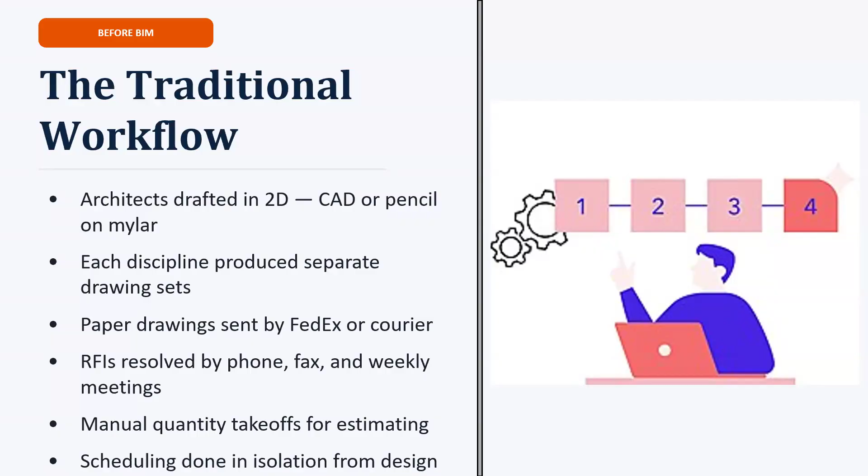The consequences are pretty expensive, because there used to be something called light tables. It's a table with a sheet of glass, just a plain sheet of glass, and then you'd have powerful lights underneath it. And then I'd take my white sheet of paper with my structural drawings, let's say second floor structure, and second floor mechanical. I'd lay it on top of them, and then I'd go through each one to see, oh, what's the elevation of this beam? What's the elevation of this duct?

And I would check them off with a green check mark. Every time there was a problem, I'd circle it with a red one and say, hey, we need to figure this out. And 95% of the problems you caught that way. With the 5% that you didn't catch, that ended up being a problem. What do you mean that ends up being a problem?

Well, actually, let me get back to that in a second.

The other thing that always happened was these drawings, as the RFIs came in, got updated. But with all these issued drawings, think about a building - there are anywhere from 50 to 70 people from different trades that have to come together to finish it. What's the chance that somebody is not looking at the current set? It happens all the time, and that became a problem. All of a sudden you're building off an old design that's not even the current one. And guess what? Now you have to rework it.

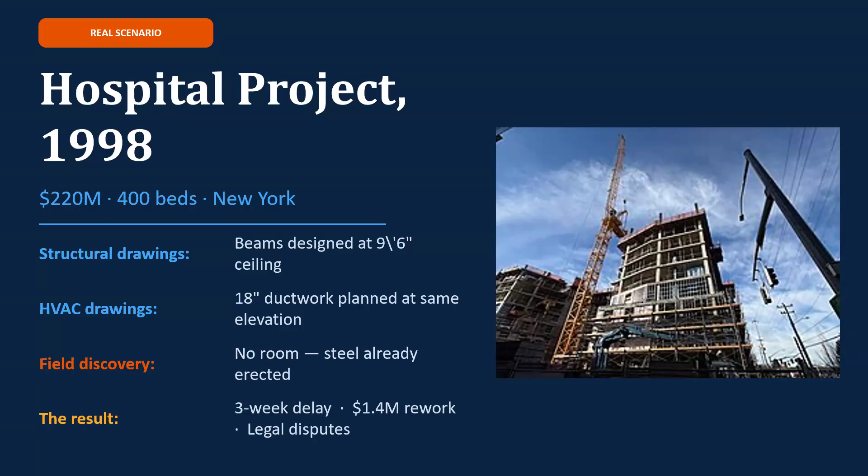Well, enter BIM. It's a 3D modeling environment. First of all, BIM stands for Building Information Modeling. It's a 3D representation of a physical facility, except there is intelligence associated with it. We sometimes call them parametric models - what are the parameters? Well, the parameters are the information about each of the objects. So instead of using lines and drafting tables to draw our buildings, we started building with objects, where a steel column knows how heavy it is, knows that it has to be vertical or slanted, knows that at the ends you've got to have connections. Those kinds of things we're able to build into that, and that's changed everything as far as how people think about it.

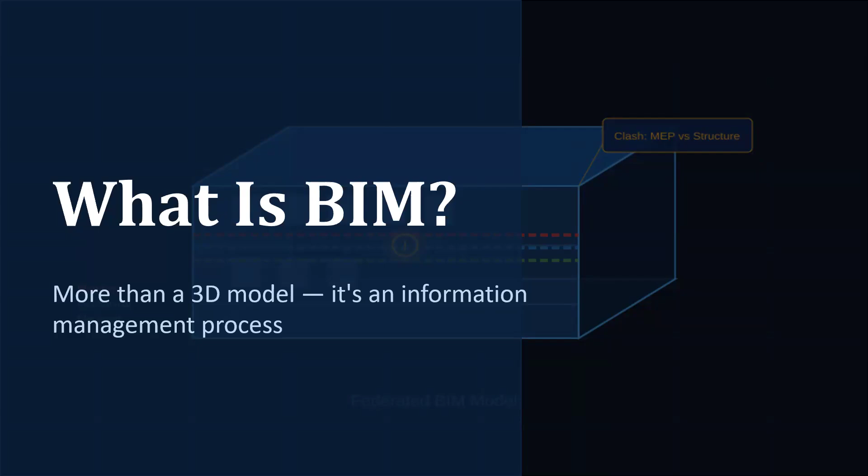It has geometric data. It's a collaborative process. And if you think about a building has what I call a life cycle, right? From the time the owner comes to you and says, I want to build this new facility, to the time the owner says, this building has gotten too old, I want to tear this down and build something else here, or rebuild it. And in the process, you may have done 8 renovations to the building.

But that's the entire life cycle of a building. Well, BIM is able to hold that information throughout the life cycle of that building, from conception to demolition.

The National Institute of Building Sciences has something called the National BIM Standard, and they define BIM as a process supported by technology for creating and managing digital information about a built asset across its entire life cycle. It's a digital representation of a physical asset, but it's a process. Yes, it is software enabled, but BIM itself is a process.

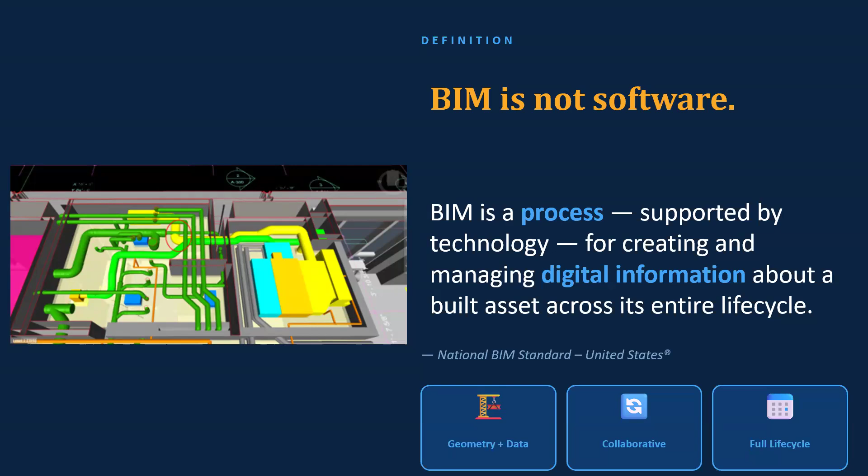I'll get into more of the geometry and that sort of thing. Here's a brief history about this.

There's a gentleman, he's passed away now, Chuck Eastman. He was at Carnegie Mellon in the 1970s when he said this. He called it the building description system. He actually said we need to build buildings digitally in this way. Of course, that didn't come to fruition for another 30 years because our computers weren't fast enough or powerful enough to do what we're able to do today. Chuck eventually left Carnegie Mellon and came to Georgia Tech, where he retired and passed away as an emeritus professor.

In the 1980s we had some programs, RUCAPS, ArchiCAD. ArchiCAD isn't that anymore, but it originated in Hungary when Hungary was part of Russia or the Soviet Union.

In 2002, Autodesk acquired this software called Revit. Revit was a startup company based out of Boston, with many of the principals from MIT. One of the guys who was a partner in the original firm that sold Revit to Autodesk was from Atlanta. They sold it when the dot-com bubble was happening, the stock market was crashing.

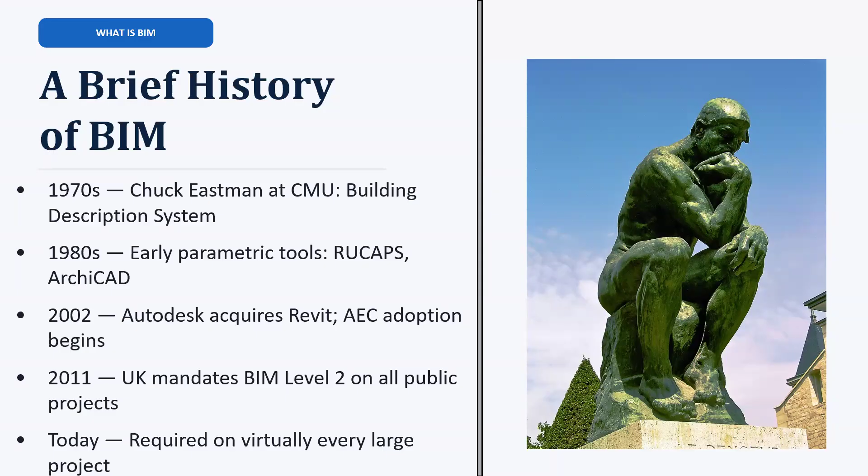However, if I'm an architect, I'm not drawing anything that's not BIM. So consequently, it's ended up being everywhere. The contractor may not use it on a dentist project, but they certainly would not touch a hospital without BIM. They will say, listen, we can't do this, there's too much risk involved. It saves us so much time and money that we do not want to touch a project that doesn't have BIM on it. And BIM has, again, not only the 3D geometry for everything.

Now let me lay the groundwork for something we're going to see in the fall - there's something called a BIM server these days. What is a BIM server? Well, first of all, what is a server? What do we use servers for? Data storage, right? And BIM servers are just that, to store BIM data.

At the start of a project, we'll start a project on a BIM server, and the architect will give access to all the other designers. Then all the other designers can go and put in their stuff as the design is progressing, and they can see how their work coordinates with everybody else's. If they see a beam, they can reroute the duct under that beam. So it is now a collaborative environment, because we're able to see everybody else's design and understand as we're designing, as a design team.

But in the start of any construction project, the first thing that happens is the architect and the structural engineer will get together and say, okay, where are we going to place our columns? Because that dictates how the building is going to look and feel. You can't have a column in the middle of a classroom, that defeats the purpose of the classroom. So we're going to first locate our columns, and then they can have a discussion.

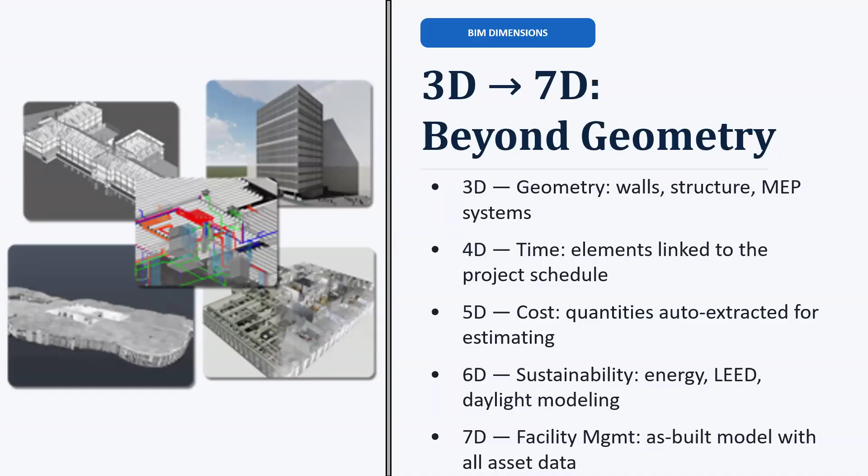People are managing their buildings in that way right now, and all of that got enabled by BIM. So how does BIM change everything? It changes design, construction, and operations. Very briefly, we used to do 2D drawings. We don't do that anymore. We now do parametric models.

Here's the thing people had to do: when you open a set of drawings, if everything is drawn by hand and I decide my door needs to move a couple feet this way, well here's the problem, I have an elevation view I need to fix and a plan view. So I had to revise multiple times, whereas that's not the case in BIM.

In BIM, you draw something in 3 dimensions. There's no 2 dimensions anymore. Everything is connected. You may look at it in 2 dimensions, but you're drawing in 3 dimensions. You catch the design errors before they become a problem, most of them anyway. I'll tell you some stories about things that happened on this campus that ended up becoming very expensive, just because we didn't use BIM during that time.

The owner can now visualize what the building is going to look like and tell you, I like this, I like that, can we do this instead. We could do virtual walkthroughs now, as the owner comes into a dark room with 360-degree projectors. I can project my space in there and have the owner walk around at a 1-to-1 ratio so they feel like they're actually walking in the building. So the owner can say, I don't like that, I like this, can we change that. You couldn't do that with just 2D drawings.

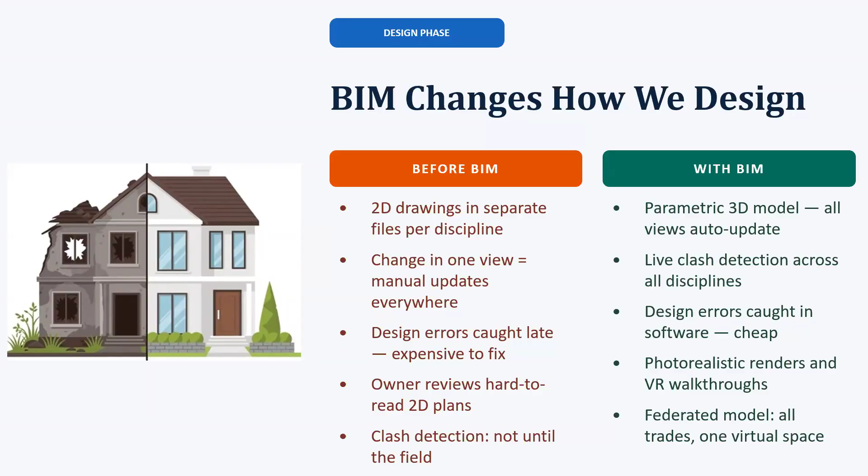And then anytime there were clashes, if there were clashes as in something ran into the other, we caught a bunch of them, but the ones that we didn't catch ended up being expensive.

And then there's this term now we call VDC, Virtual Design and Construction. This is really interesting to me. Almost all companies have a VDC principal, but they don't call them vice presidents, because often they're the youngest people at the leadership table, right? You have a seat at the leadership table and you're most likely under the age of 40. The guy at Brasfield is probably about 40, right? Biggest construction company in the Southeast, right?

Russell Gibbs. But essentially this whole office came about in the construction industry. Sticking to Brasfield, and all construction companies are very similar to that. Before 2010, let's say, if you graduated from building science and you wanted to go work for Brasfield, almost always you started in estimating, because they had about 300 estimators. Today they have about 20, but they have a VDC staff that's about 70, right? And they have VDC people in all projects and what have you, right? So this whole office called VDC, Virtual Design and Construction, came about only in the last 15 years or so, right? Or at least popular in the last 15 to 20 next years.

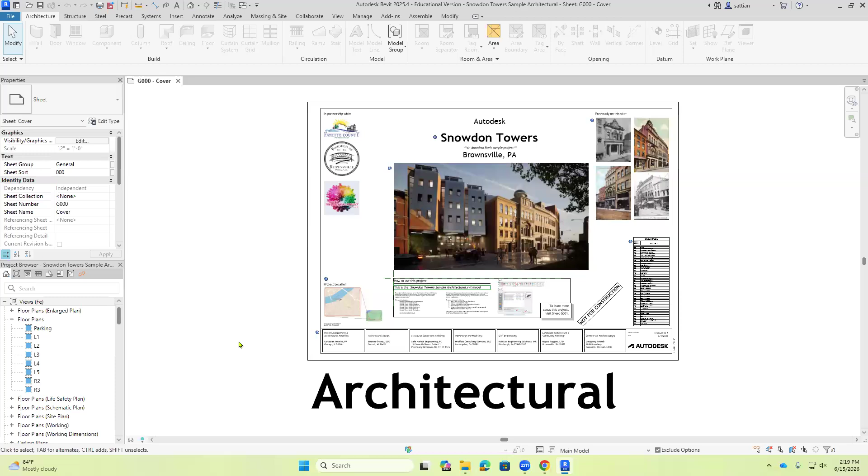Jenna, I need to talk to you after class. There's no point in you doing the same thing that you've already done eight times in architecture school. I have a different assignment for you.

You came here to learn, right? You want to give me a different one too? Are you an architect too? All right, both of you. Yeah, there's no reason for you guys to do this through this assignment.

Well, there's no point. What are you gonna do, relearn the same thing? At least the architecture and structure part, and then the rest. You probably haven't developed HVAC, plumbing, electrical models, which we'll do, and you're gonna have them. I'll let you do that along with the rest of us. But as far as these projects, I think it's wasting your time to do this again. But listen to me anyway. So I don't mean this assignment - actually you work on this assignment, but I'm talking about the fall.

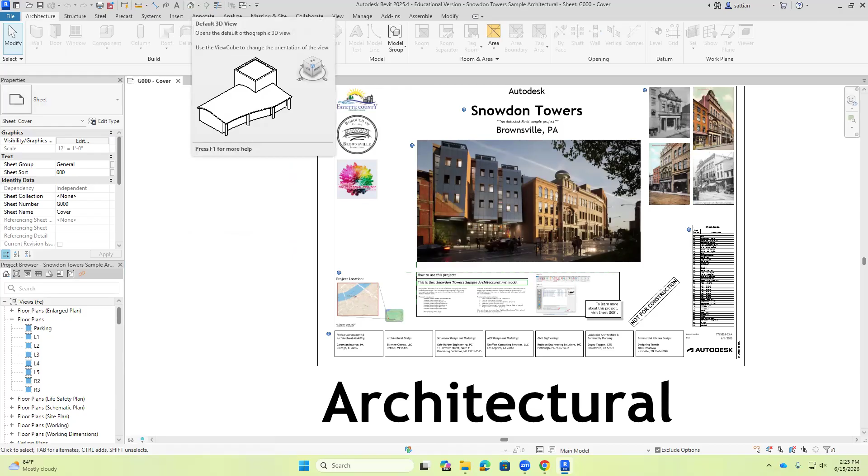Now, this icon right here will show you the default 3D view. Notice that little icon right there? If I click on that, it shows me a 3D view. And again, you can use - this is the cube over here - you can use the cube to rotate, orbit. Now, the wheel is to zoom in and out.

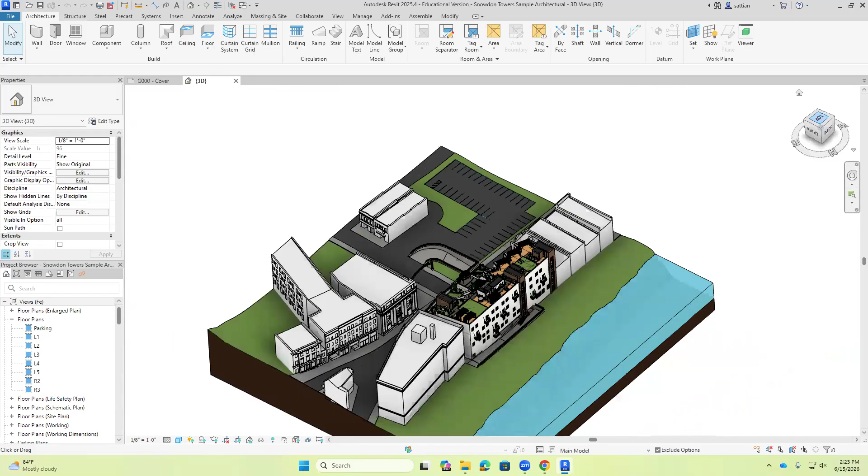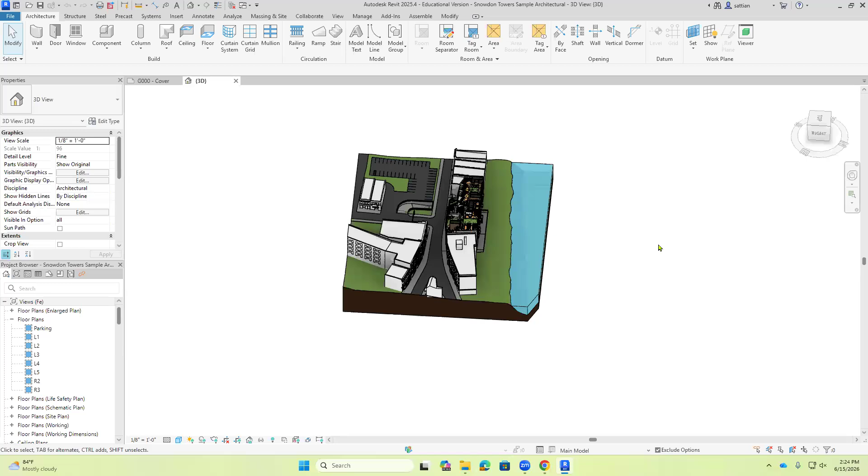If you want to look at it from the top, just say top, and it will adjust the view to show you just the top view. And then you can hold one of the corners and rotate around. You can hold your wheel down and it will allow you to orbit.

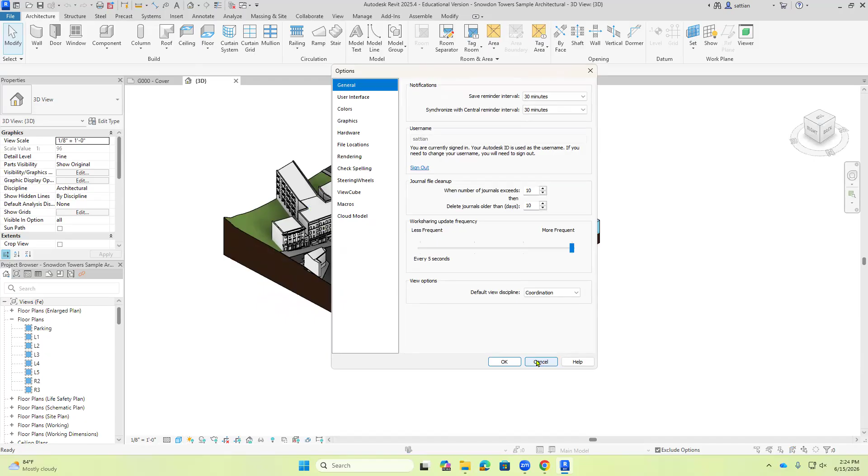Now, if you want your wheel to do certain things when you do something, you can set up all that. If you are interested, go to File, Options, and you can set up how you want your mouse to interface with it. I won't do that in class - if you're interested, you could YouTube it and try it out yourself.

Now, as far as this project, what I wanted to show you was, first of all, notice that they were able to model the terrain on the project. That's got nothing to do with the building, but that's the terrain on a project. And then also notice on the left-hand side, it says floor plans, and it has floor plans enlarged. For now, let's just focus on floor plans. When I click on L1, it opens up something that looks like a floor plan from a typical PDF file - this is the actual architectural model.

So what I'm saying is, when you draw something in Revit, I am not drawing in two dimensions - everything I do is in three dimensions.

But I can cut at a certain point and look down and call it a floor plan, right? If you take a building, if you take this floor, how do you generate a floor plan? Well, if I cut it at the top, let's say 4 feet above the ground, I cut it and look down, I will see this room in a floor plan view. I can show all the furniture, but I can't show the television, because I cut it at 4 feet, so I'll see everything 4 feet and below. Does that make sense? Imagine an object, you're going to cut it and say this is the ground floor, this is the first floor, the second floor, the third floor, and so on.

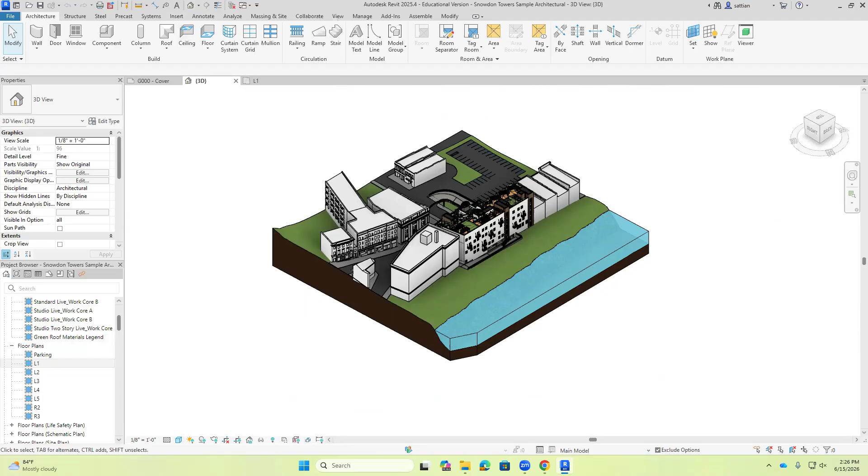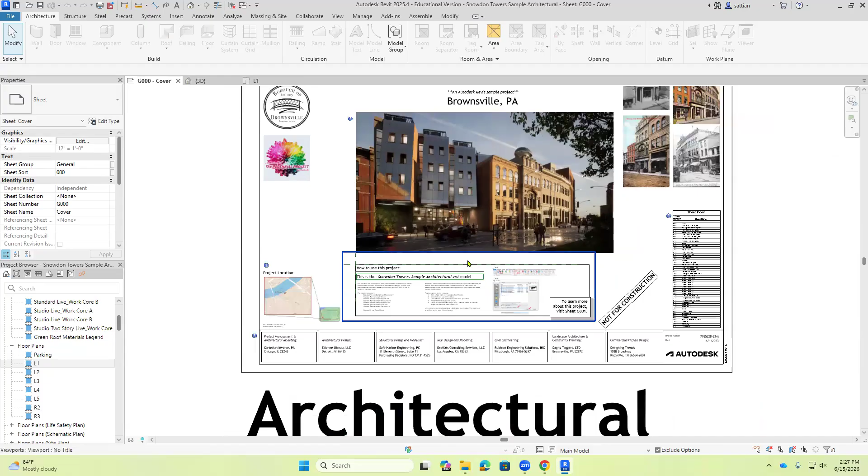Just click on that little icon, that'll bring up 3D. And then you can click on this L1 to bring up the floor plan. Now this cover sheet is basically starting to look like a typical construction drawing, isn't it? Somebody created this in something called sheets. We have something called sheets, and somebody developed that under sheets.

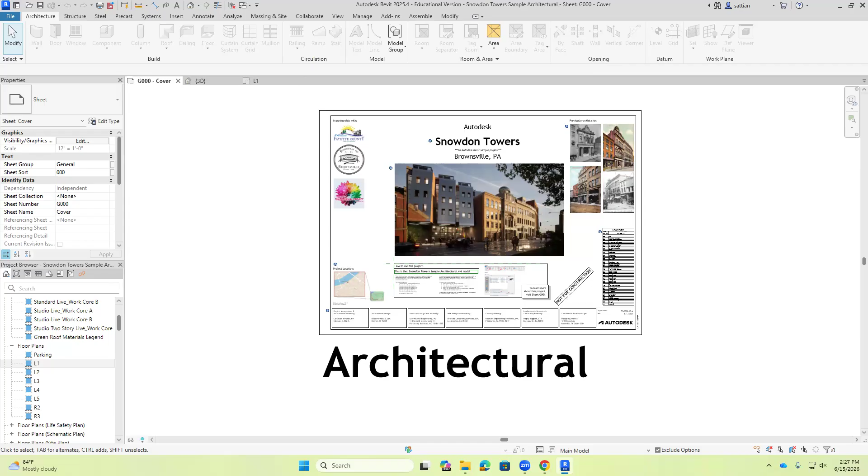L2 is again an expansion of that, and then R2 and R3 may be roof 2 and roof 3. So this is how this program is set up. On the left-hand side, this project browser has many different aspects to it. First, it has floor plans, then life safety, maybe even structure, 3D views and different things, maybe even HVAC drawings and so on.

This is where you browse different parts, different aspects of the project. And then you have something called sheets. Sheets is where, if I open a sheet, this is what will get printed. If I eventually want to create a printout of my design, which is what architects want to do to produce blueprints, this is what you can make it look like. This is what we've been doing - now if I open my Bluebeam, that's what it looks like, my floor plan, because it got printed from here.

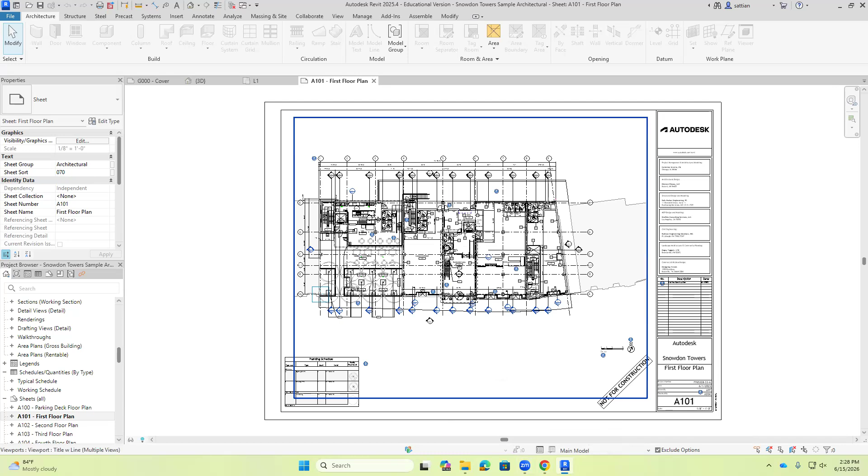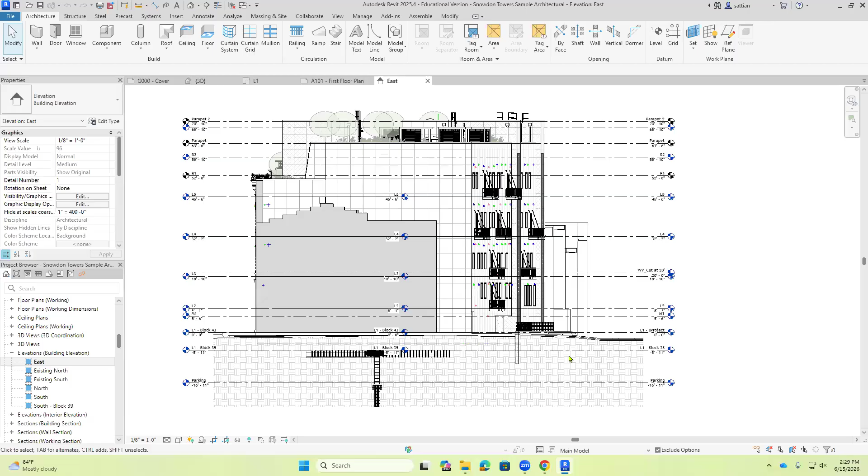Notice the different floors. If I scroll down here, there's something called elevation, building elevations. If I say east elevation, you will start to see that looks like this, which is basically, if I stand outside and look at it from the east side, what will I see? That's the east elevation, essentially.

And you see all these blue lines, those are called levels. A level should be interpreted as a floor. I just showed you where I would cut it and say that's the first floor. A level is basically where I cut it in the three-dimensional view so that I can look at it from the top. That's what a level is.

And then elevation views, you could look at different elevation views. Now, this elevation is in black and white, and there's some color, but not everything is in color. You could change all of that - notice on the bottom, it says detail level is medium. I'm going to change that to fine. Somebody locked this view, so I can't open that, but I'll show it to you in a different project. You'd be able to change all of that to see in 2D and 3D eventually.

Now let's, so that's the basics - the floor plans is where all the magic happens. The 3D view is what it looks like in the big scheme of things, okay?

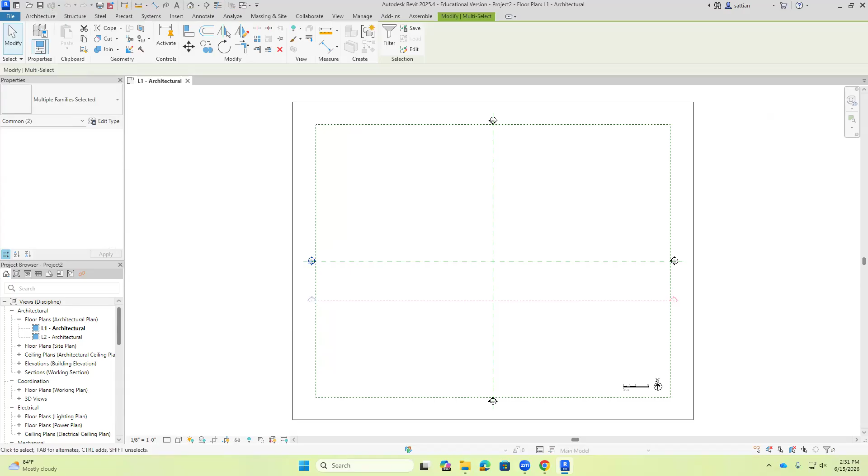So now let's get back and open up a new project where we will start something. New model, not new Revit, okay? New model, Imperial multidiscipline. And then in order to get rid of these, there are two ways to select something. Notice if I draw a box from the top left-hand side, nothing gets chosen. However, if I draw a bigger box, what got selected? What got selected was that little bubble over there, the east elevation bubble.

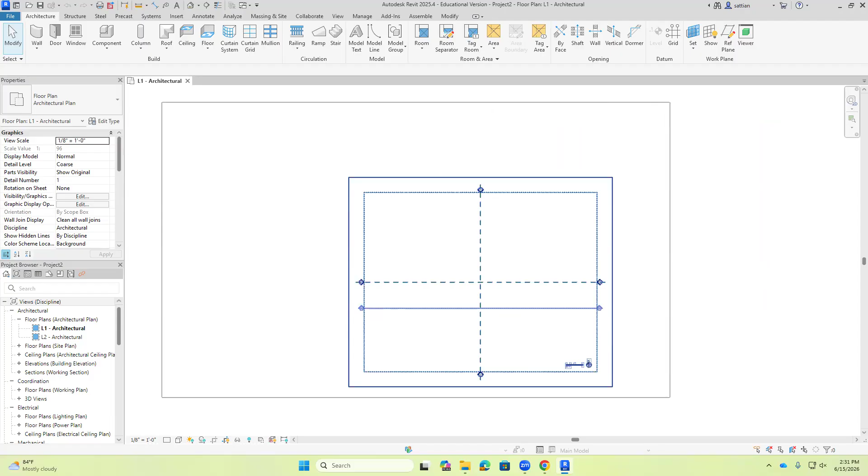So if you want to delete something, they gave us some guidelines. I don't know why they decided to give guidelines - this only started like 2 versions ago. But anyway, in order to delete or select something, if you draw a box from the top left, everything inside the box gets selected. On the other hand, if you draw a box from the bottom right, everything the box touches gets selected. That makes sense?

So I'm going to select those 2 lines and just delete them. What now, the second part, what the box touch?

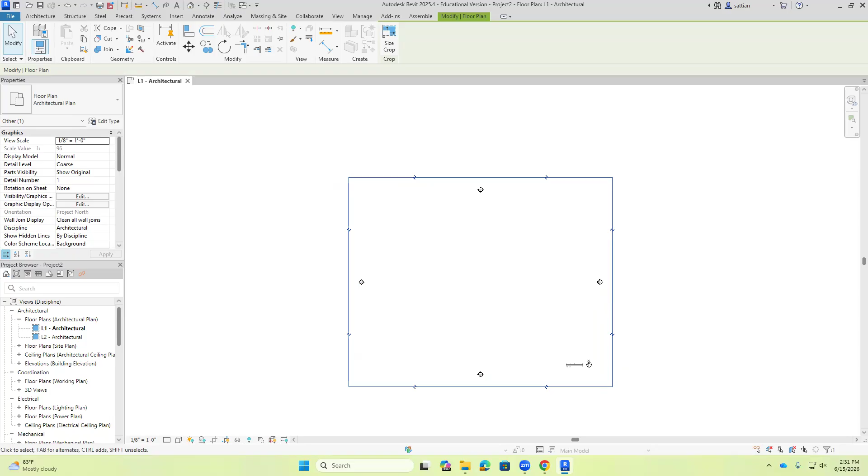So if I draw a box from the bottom right-hand corner, whatever the box touches, it picks up. But if I draw a box from the top right-hand or top left-hand, anything that's completely inside the box gets selected.

Now, before we go anywhere, when nothing is selected, what you're seeing is the properties of the view. Scroll down to the properties of the view, and where it says crop region visible, uncheck that. Don't select anything, just click in the white space, and you should see these properties.

Where it says scope box, change that to none. And then there should be a crop view that was now visible, you can uncheck that. Change the scope box to none and uncheck crop view.

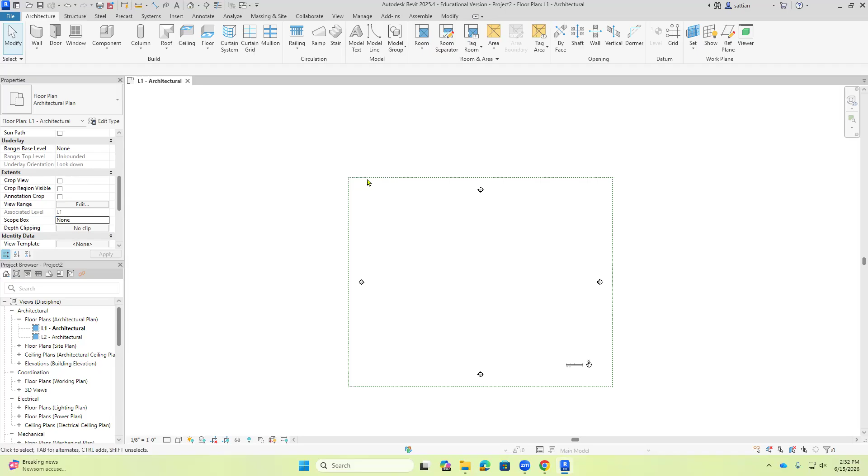And now let's delete that box. It's telling us which direction is true north and what is the scale and all that - we don't need that. I'm going to select it, delete that as well. So I am looking at this after I'm done.

How did you delete your, what is it, scale? You just click on it. That's all it does.

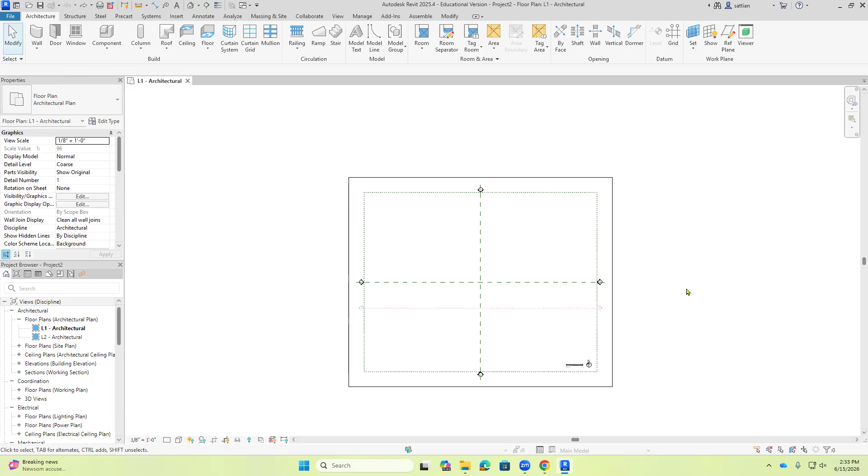So if you're here, I just selected that box and deleted it with my delete icon on my keyboard. There's a delete icon on the keyboard.

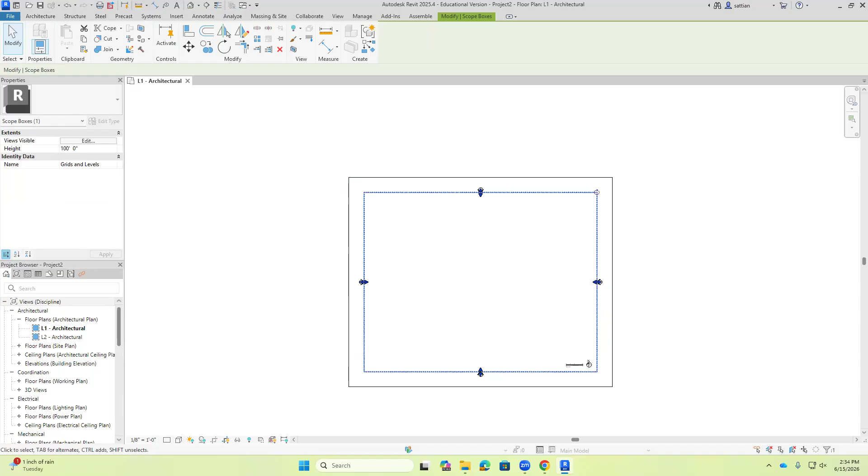Okay, now scroll down on the left-hand side and change. Again, you see the delete on your keyboard? Yeah, so select it by clicking on it or drawing. Once it's selected, notice how it turns to blue and just hit delete.

Here? Yeah. Yep, delete all. Undo.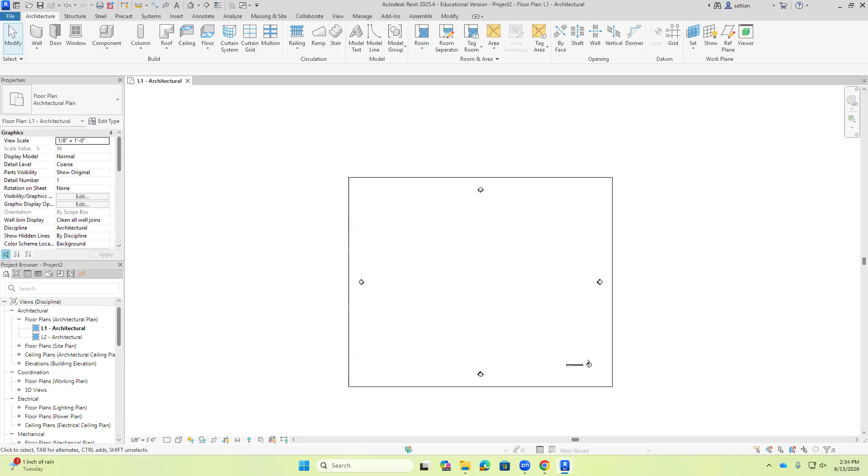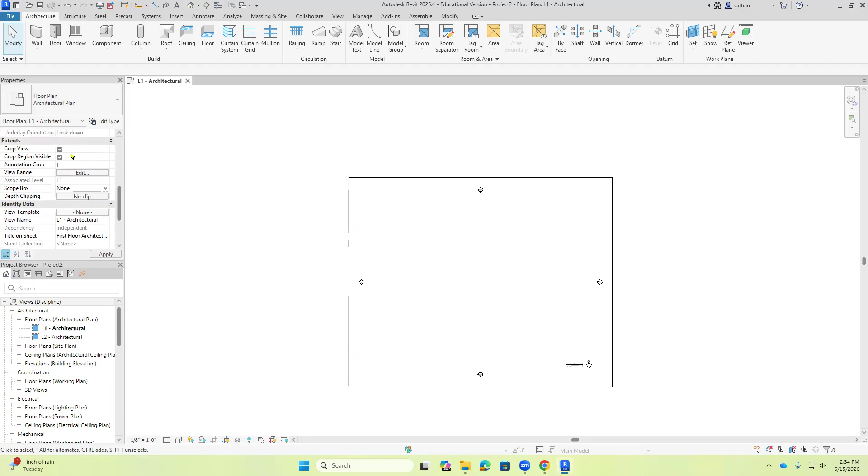And then on the left-hand side, scroll down to scope box, change that to none. And then uncheck the crop view and crop region visible.

All right, everybody should be here. Now let's first create - let's say my building is 3 stories tall. And the floor to ceiling height or between levels, which are basically floor plans, is 15 feet.

So open up one of the building elevations, click on east elevation, let's say. Right now it's showing me L1, L2, and then L2 is at 12 feet. Click in that 12 feet, change it to 15.

Now if I say 15 and hit enter, it will interpret 15 as being feet. You don't have to enter the feet symbol. But if I wanted 14.6 instead, I click on that dimension, push 14, space 6, and that gets interpreted as 14 feet 6. Okay, but I want to leave it at 15.

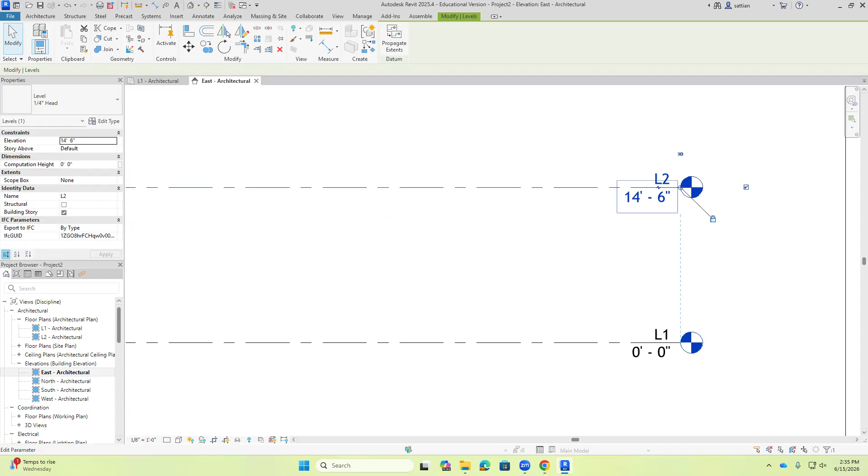Now, while I'm still here, notice this is the ground floor, that's the first floor. I want a second floor and I want a roof. So in order to draw that, in the architecture tab, I'm going to select level. And then I'm going to hover over and say, well, about 15 from there.

Now, the way this works, this is interesting, take a look at this. If I hover from this distance, it's moving in 6-inch increments. You see that? But if I zoom in and now hover, notice how it's using 1-inch increments. So the more you're zoomed in, the more precise it gets.

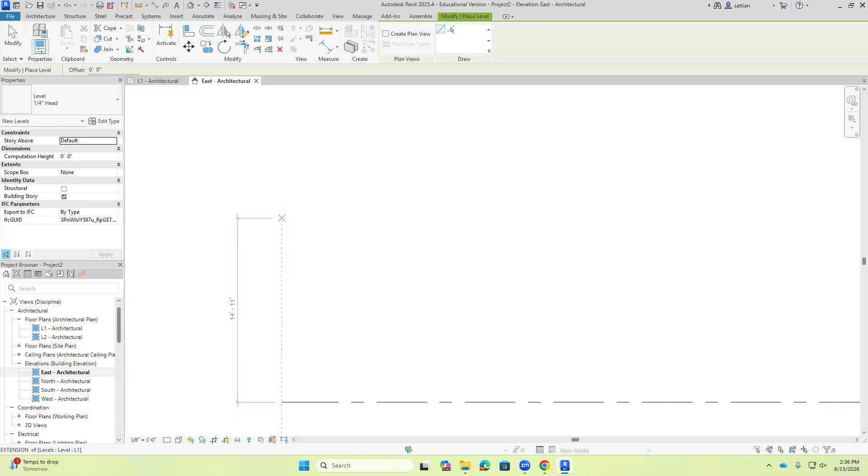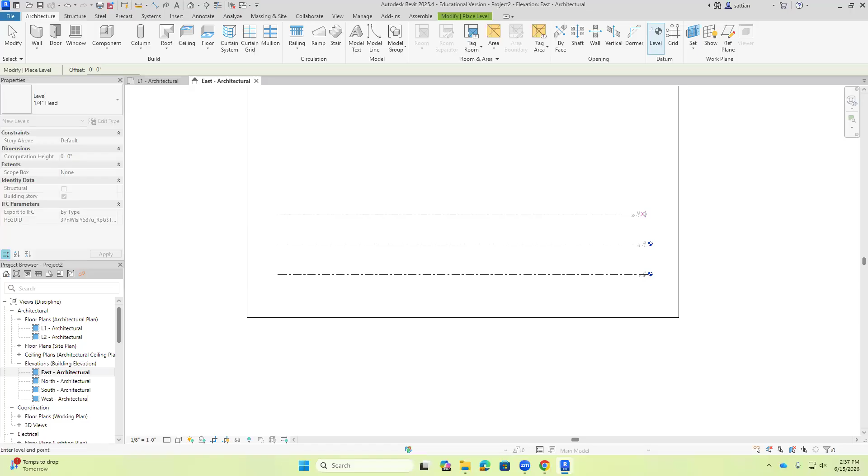Okay, question. So east elevation, architecture tab, level. And then at 15, I'm going to say, yep, draw. And notice how it's giving me the guideline. And then paste it there. I'm going to go to one more.

Yeah, it's grayed out, right? Yeah, let's fix that in a second. Now, L1, I don't like calling things L1. Oh well, actually for now let's leave it like that, we'll worry about that later. But you can rename these, my point.

If I say 01 dash first floor, notice I can rename that. Escape, double escape - anytime you want to cancel out of a command, double escape will get you out of the command.

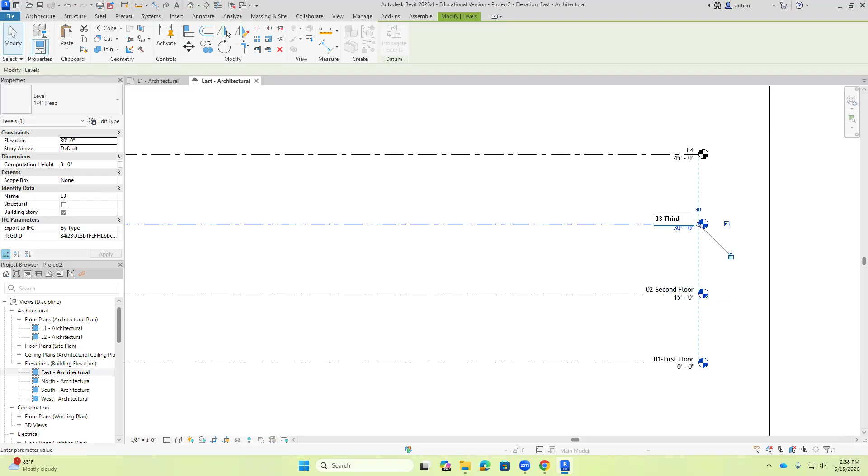Okay, I've renamed my views to 01 dash first floor, 02 dash second floor, 03 dash third floor, 04 dash roof.

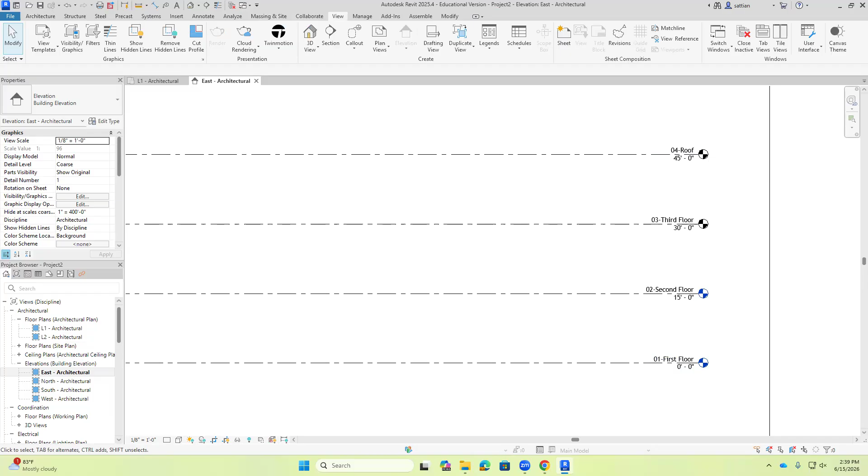Let's bring this in. Notice on the project browser where it says floor plans, it does not show me 01 first floor, 03 third floor, 04 roof - it shows L1, L2 instead. So what I'm going to do is go to the view tab. Once you've drawn these other levels like I just showed you, go to the view tab, go to plan views, floor plan. All the views that do not have a view associated with them will show up.

Select both of them by holding your shift key and say okay. Notice what happens on the left-hand side - now you have L1 architecture, L2 architecture, 03 third floor, 04 roof. That L1 architecture, L2 architecture, I want to rename those to my views. So I'm going to delete them, go back and recreate those views as floor plans, and now mine are called 01 first floor, 02 second floor, 03 third floor, 04 roof.

Now the reason I named them that way, 01, 02, 03, is otherwise it will come in alphabetically ordered as opposed to logically ordered. I want my first floor, my second floor, my third floor, my roof. If I don't put the 01, 02, 03, 04, it gets sorted differently.

You just deleted the two. Yeah. And then go to floor plan, and any view that you created that does not have a view, or any level you created that does not have a view, will show up and say I want to create those too. So when we're done with this, you should be somewhere where I am.

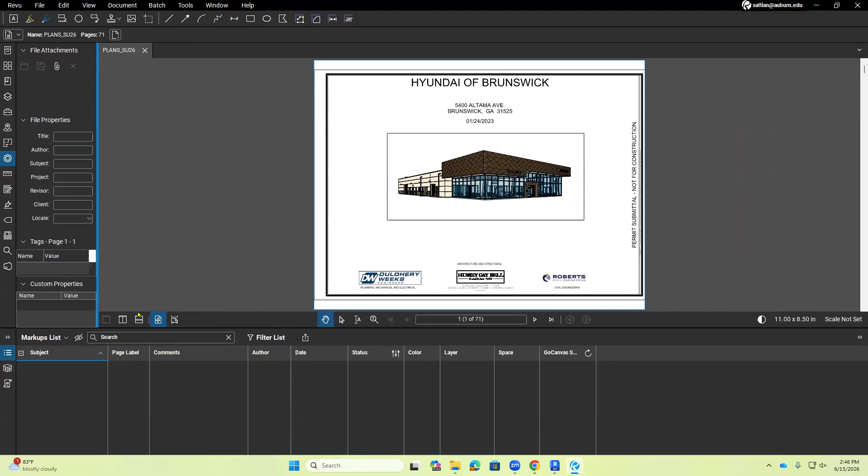Now, when I open a set of drawings, I'm going to open up the drawings for this assignment on Bluebeam. I just want to show you something. If I go through these drawings and get to the architectural drawings, I have floor plans. And in A4.01, I have what?

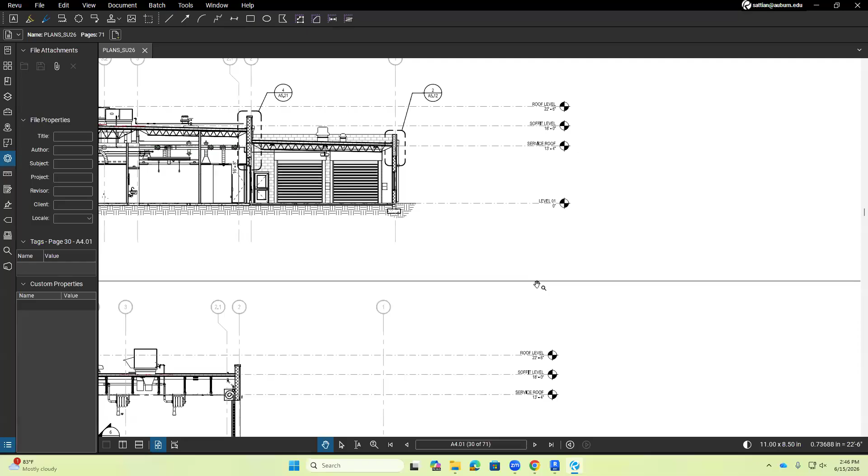Levels - the same way we created levels, they also created levels. So you know that in this project they used Autodesk to build the model. And also, if I go back to the floor plan, any floor plan, what do I see? These are called what lines? A, B, C, D on one side, 1, 2, 3, 4 on the other side - grid lines, column lines, what have you. Grid lines.

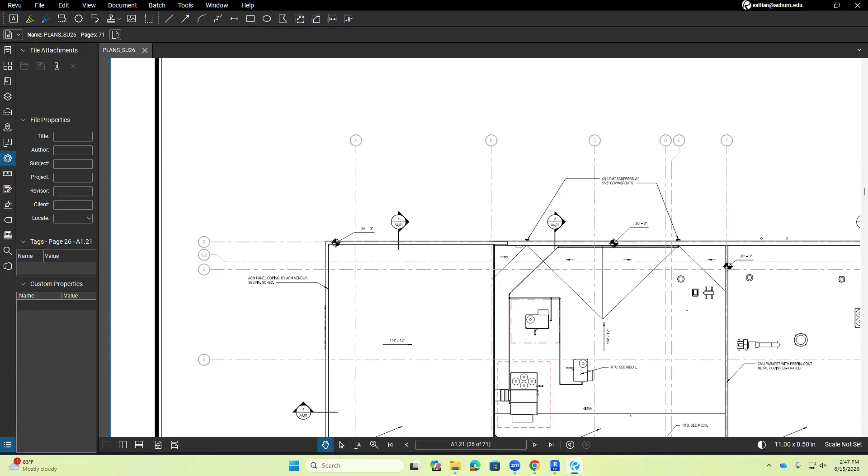So let's go ahead. I just created my levels. Now let me go ahead and show you how to create grid lines - this is the next step you have to do. Once you've done it with me, I want you to start a new project and start developing the grid lines and the levels for the project we're working on. Okay, that's the first step. Anytime you're doing grids and levels, start with levels first, then grids.

All right, let me show you how to draw a grid line. In fact, I want to show you how to draw maybe 5 going this way every 25 feet, and then 5 going north to south, top to bottom, every 20 feet. So instead of drawing one at a time, I'm going to go to the architecture tab, select grid. This is a 2-step process - you're going to watch me do this. Select grid and let me draw one of them.

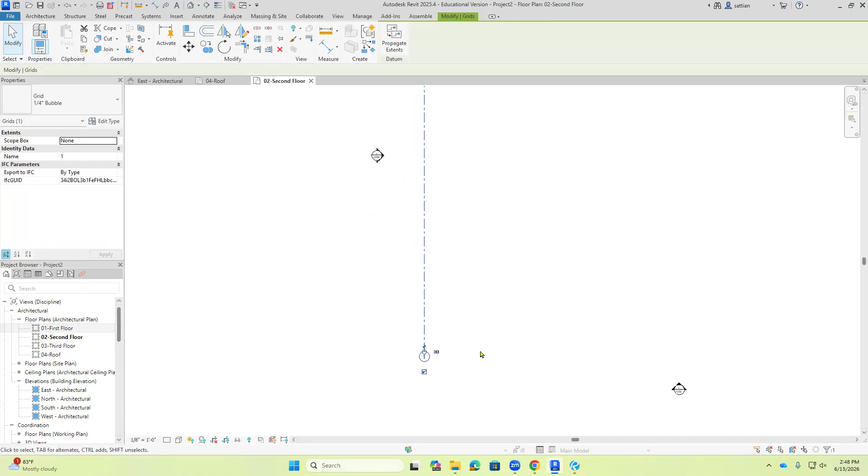Okay, I'll draw one grid line. And then I will say, hey, I want these to be labeled not 1, 2, 3, 4 - let's start with A, B, C, D. So I'm going to click in one and say A.

Now I could draw another one by selecting grid and hovering over here. Now it's moving in 4 foot increments. So at 25 feet, I could draw another one, or I could do multiple by doing this.

This is called creating an array, meaning I want to copy and create a bunch of them. Here's how I might go about doing that. Go to the Modify tab, click on that tool called Array. Click on it once and then go 25 feet.

Okay, now I can do it. Click once and then go. Again, if it's not going exactly, first make sure it's at 90 degrees. But if it's not going exactly 25 feet, just type it in on your keyboard and hit enter.

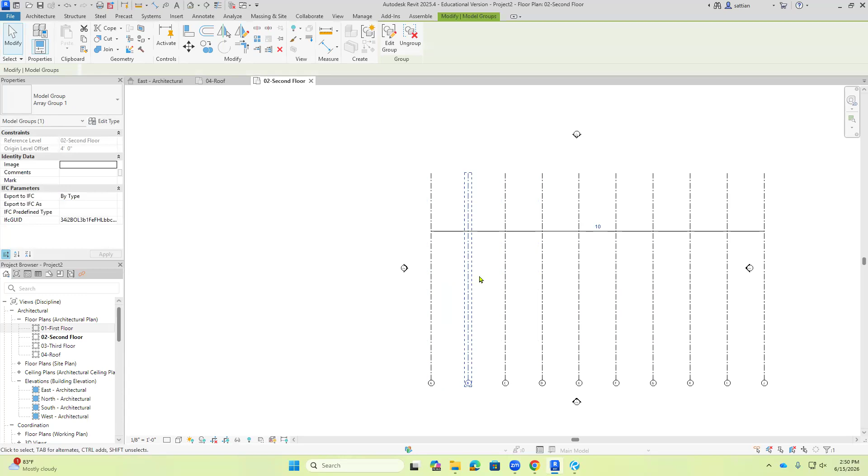And it asks how many copies you want me to make. Let's say I want 10 copies. So there's my grid going in one direction. Then I'm going to select them all and ungroup them - if they're grouped, it won't let me independently manipulate them. So let's first ungroup those.

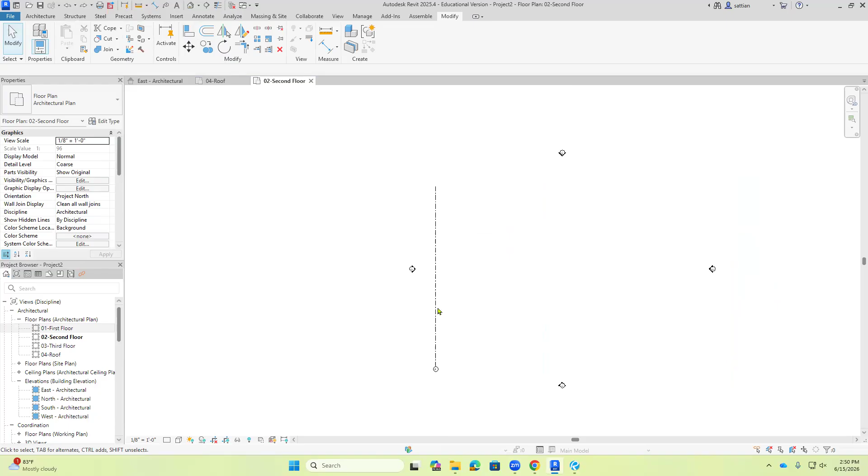Let's do this again so everybody can watch it. I drew one grid line. Now I want to create 10 copies. I'm going to select it first and then click on the array tool - notice little dashes and lines came around it. Click on it once and then go however far, but at a 90-degree angle.

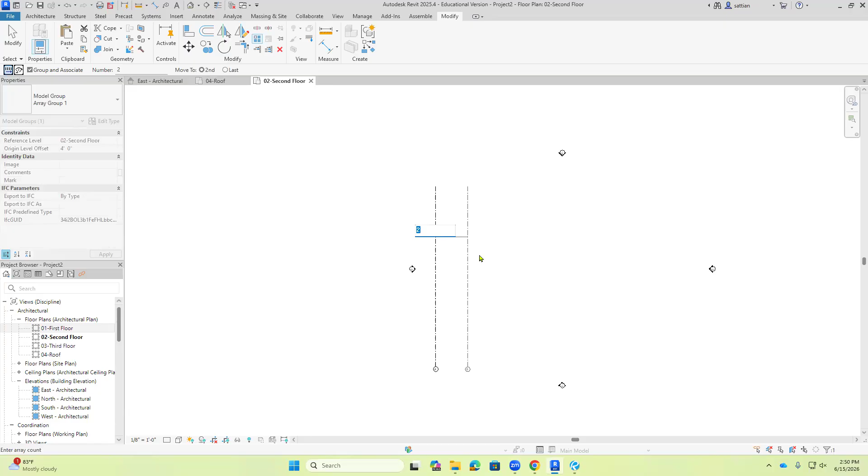I'm going to type in 25 feet and hit enter. It asks how many copies do you want - I want 10 copies. Then I'm going to select them all again by drawing that line from the right-hand side and then ungroup them.

Oh, but this elevation view is now inside of my grid line. Let's draw a box from the top left-hand corner on that elevation view and just drag it out to the outside. That's how I created those grid lines.

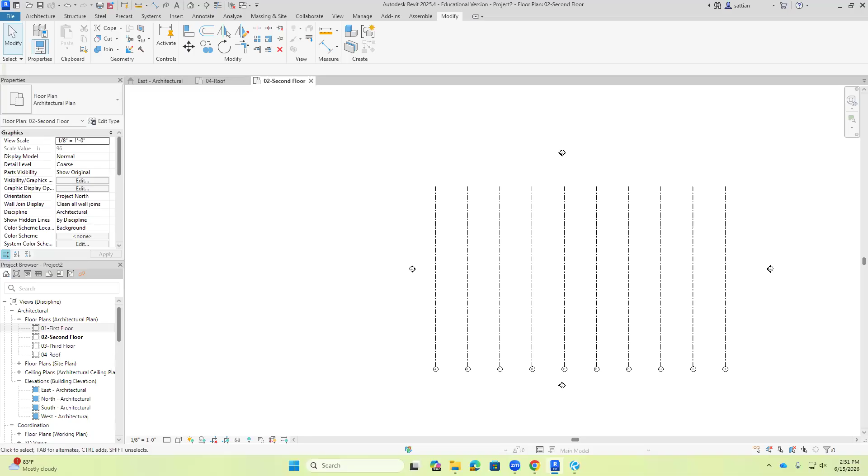Now let me create grid lines from the opposite side. So I'm going to select grid. Well, guess what - it went up to J on those grid lines. Now it wants to start back up at K.

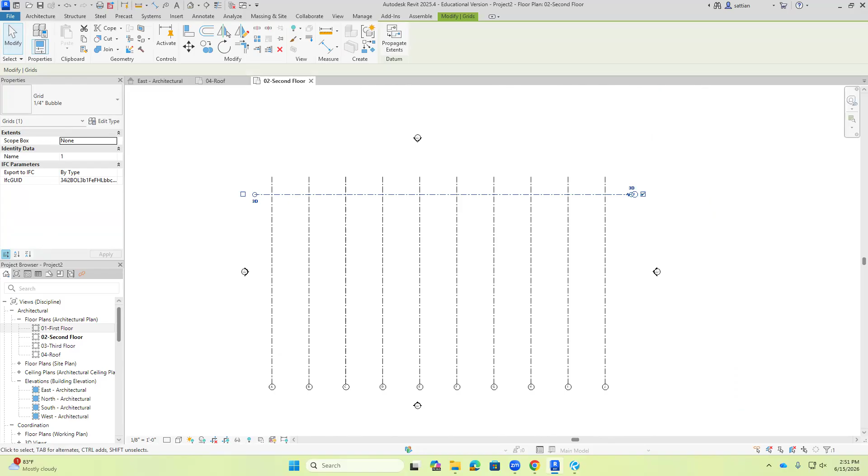Well, I don't want that. I want all of these horizontal grid lines to start at 1, so I'm going to type in 1. And this time, let's say I want 40 feet and I want 4 of them.

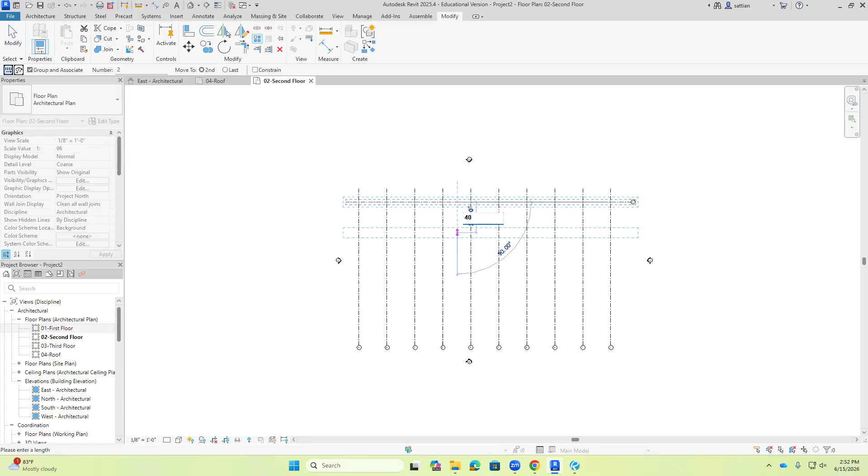So I'm going to click on the Array tool, click in there once again, and then type in 40 feet. Okay, there's 40 feet - how many do you want? I want a total of 4 of them. Okay, that's 4 of them.

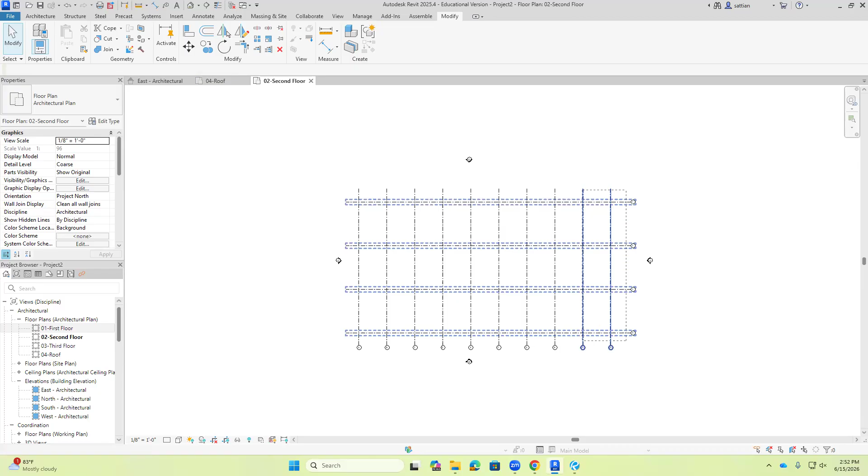And once again, I've got to ungroup these. I'm going to draw a box around, starting at the bottom right, so only those grid lines are selected, and now I can ungroup. But remember, if I accidentally select something that's not part of the group, notice I don't see that option to ungroup - only items that are part of the group need to be selected in order to ungroup.

Okay, that's how you draw grids and levels. I used the array tool so I could draw a bunch of them at one time. Does that make sense to everybody? And it doesn't matter what floor plan you draw it on - any other floor plan you go to, you will now see the grids.

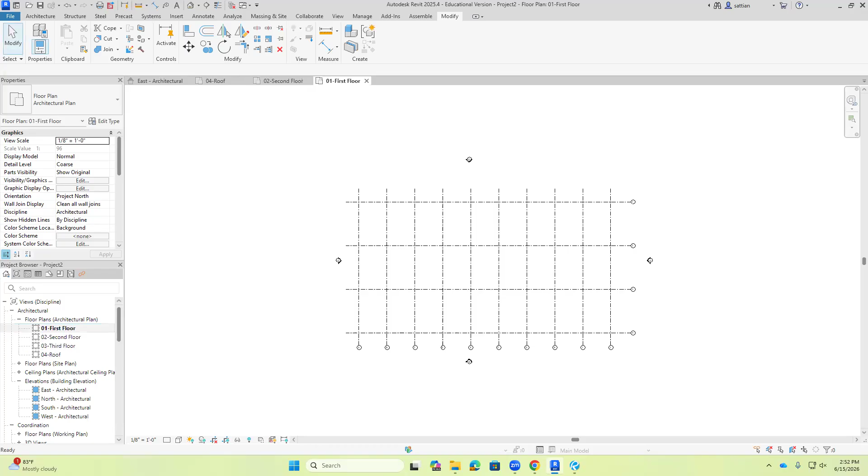This is because we drew the levels first. If you had not done the levels first, then sometimes you don't see the grid lines on that plan.

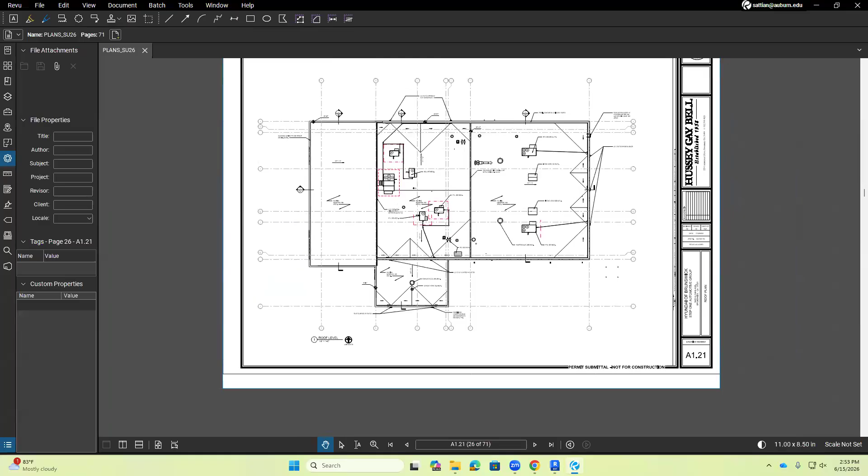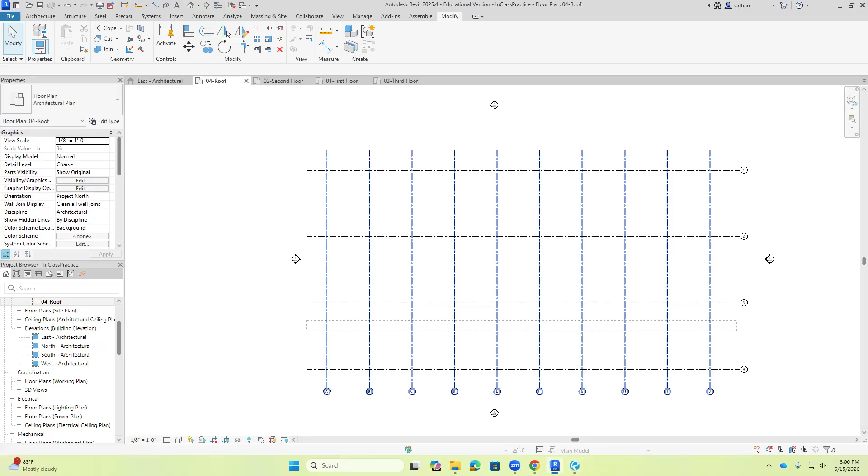All right, I'm gonna draw a grid line. This is what you guys are gonna have to do. So let's rename that to A. So let's say you want to create an array, and let's say I have 7 of them. So I'm gonna go to the modify tab. I will say, let's create an array. Click on array, click on the line.

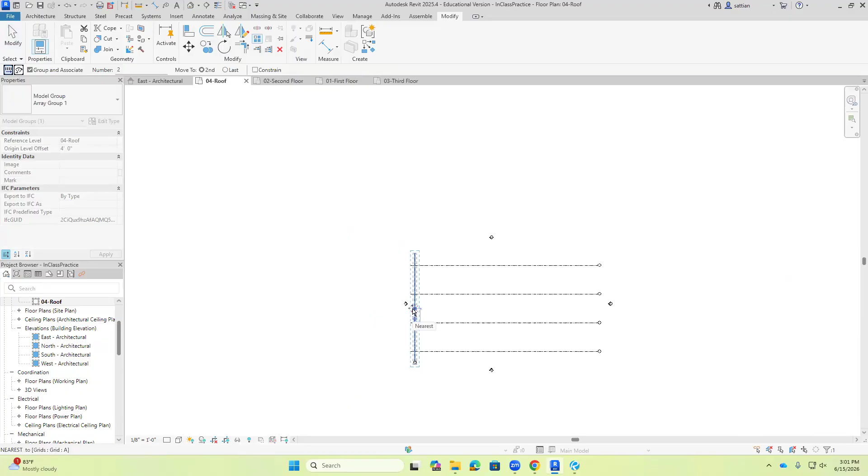Okay, so let's first select the line and then say array, click on the line and go a certain distance. It doesn't matter what distance, let's say 30 feet or 32 feet. And then let's say we got 7 copies. Okay, I've got all the copies.

I'll first ungroup them. Okay, but here's the problem: my grids are not evenly placed, they're at different distances. How do I fix that? For instance, the first one is at 35 feet. I'll select the first one and say, hey, I want this to be 35 feet.

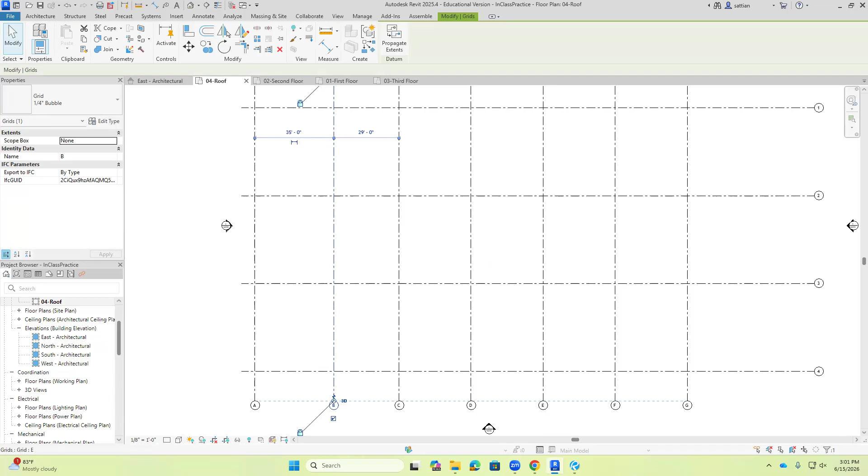Now, if you change this other distance, that doesn't move this line. In order to move this line to, let's say, 12 feet, you've got to select that line and change it to 12 feet. Let's say this one is now 22 feet, the next one is 40 feet. In other words, don't select it and only change the distance on the left, not the right. That makes sense? Just be consistent so that all your grid lines go where they're supposed to go.

I can say, grid lines don't always become an elevation.

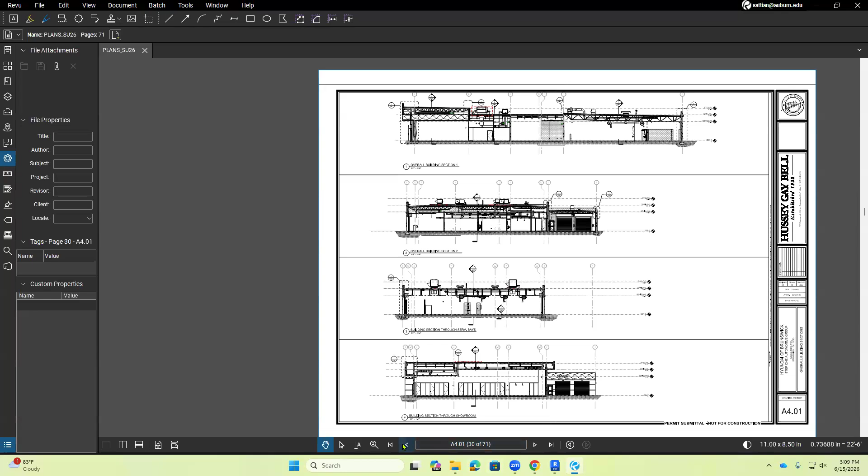So that's the one, that's how I do it, they're gonna annotate. And then you can also tell, like, super long, this line, 13.8. Figure out what the distance is between each line and then put it in. The distance, more accurate you're gonna get it, but yeah, I mean, I set the detail on it, and then I draw. That's how I do mine.

And how do we switch over after you get the elevation into the floor plan? Open any floor plan and you could do it there.

A201. Yeah, I mean, I have that problem, like, what do I click on that? Not A201, those are the. It could be that the grids are better in the structural drawings.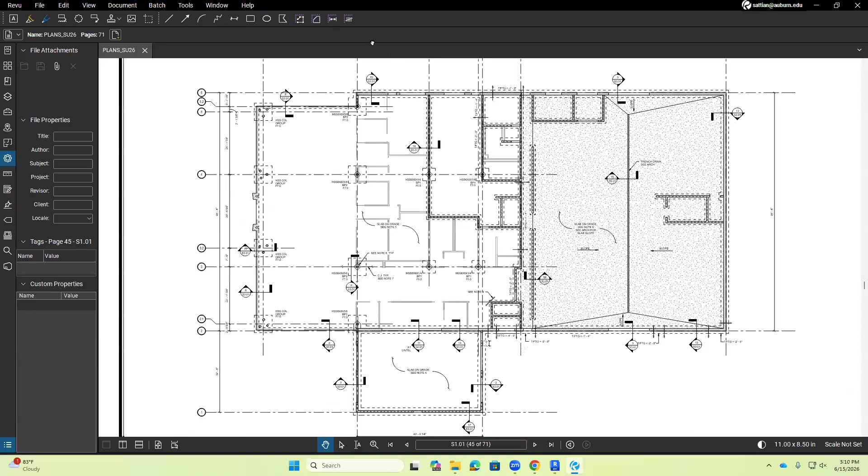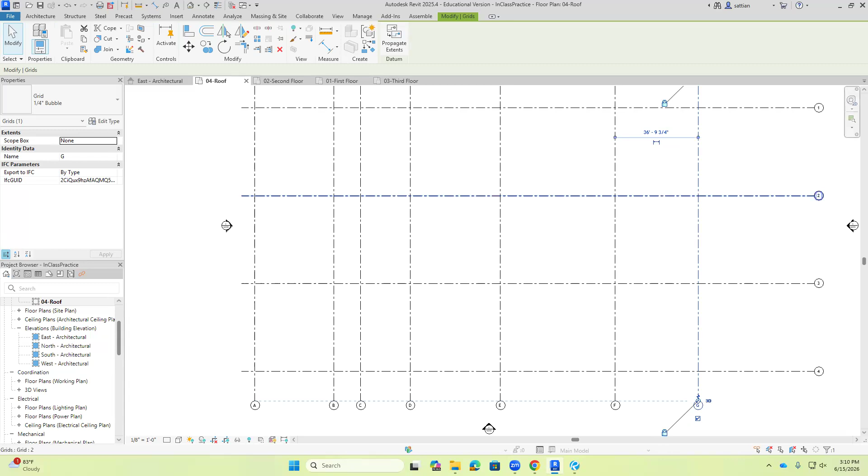By the way, how do you enter 36' 9 3/4" in Revit? This is how we do it. If I have a number that is 36' 9 3/4", I would say 36, space, 9, space, 3 divided by 4, and that becomes 36' 9 3/4". So you could move your grid lines using this drawing. S 1.01 has all the distances.

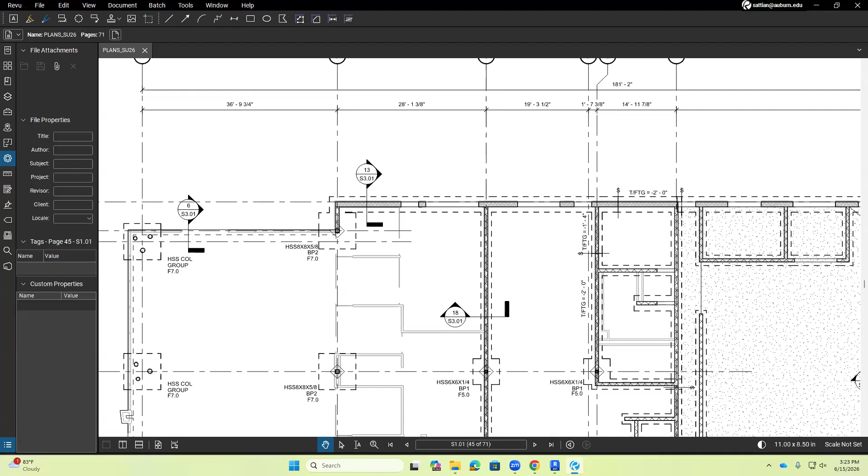Once you're done with this, I want you to go ahead and develop exterior walls. What do you mean develop exterior walls? Well, let's open up the drawing. Let's go to an architectural drawing, a floor plan.

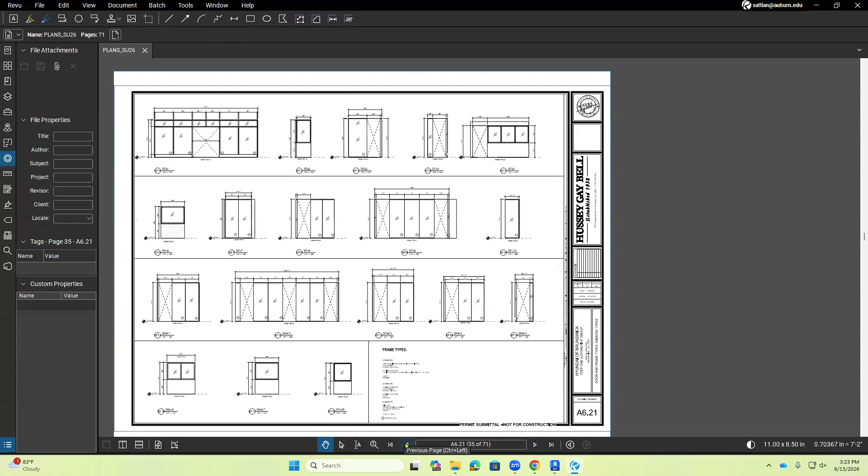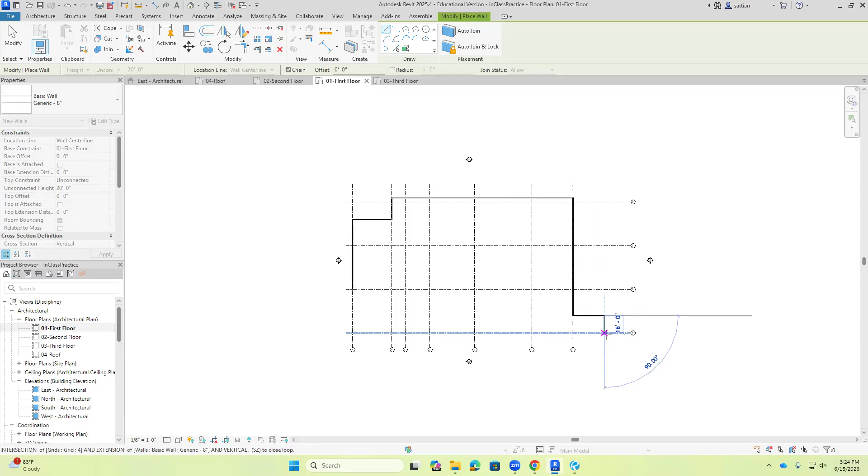Okay, this one, A1.01. Now this drawing has exterior walls, right? So if I want to draw this exterior wall in my drawing, I can just go ahead and select. Right now, don't worry about what the wall is doing, other than just do this in L1, Level 1, okay? I'm going to select wall, and then you can just follow however long it needs to be. Don't worry about the wall type or anything like that. Just draw your walls to duplicate what's shown in the drawings, both interior and exterior.

Right now doesn't matter, for now just duplicate all the walls that you see in here. So notice this whole thing is an exterior wall, that's a glass wall, and then there's a wall that goes that way all the way across. So go ahead and draw all the walls, but only in L1. Don't worry about what it looks like or anything like that, just create the walls.

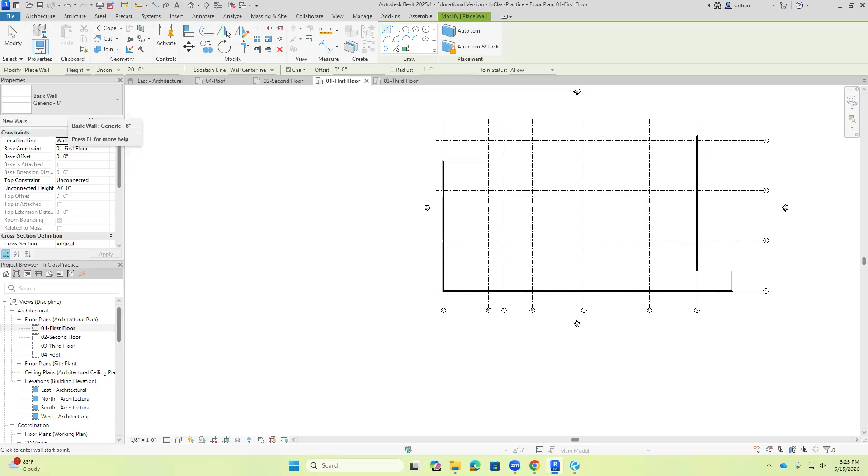So I'm gonna draw some interior walls now. Just select wall, it will give you basic generic 8 inches, don't worry about that. But let's say, for instance, in my model, there is that drawing. Now I don't know exactly, okay, this one actually has detailed dimensions of where the walls are supposed to be.

Now, openings, what about openings? Door openings, window openings, anything like that, ignore for now. We just want a box for the exterior walls. Don't even worry about the wall type, don't worry about windows or anything, just the wall. Now, notice closely when I am drawing a wall.

So now I'm drawing a wall. Let's say I'm going to draw this wall just to that grid line. Okay, now when I'm drawing a wall, notice this, watch me do this real quick please. So when I select a wall, there are a few options here. It says, is it a chain? Meaning, do you want to draw a continuous wall? It says height unconnected, 20 feet.

Don't worry about that. But location line, notice there are a few options: it says wall center line, core center line, finish face exterior, finish face interior. For now, I'm going to select wall center line.

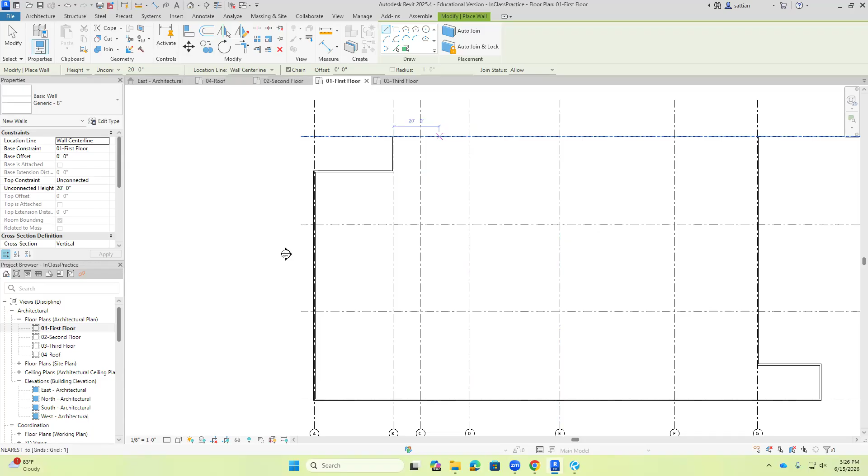And what that means is this 8-inch wall, when I draw it over here, 4 inches is on the top, 4 inches is on the bottom. Now if I want to stop my wall there, just hit escape, escape again, and you're out of the wall command. Escape is on the top left-hand corner of your keyboard, right?

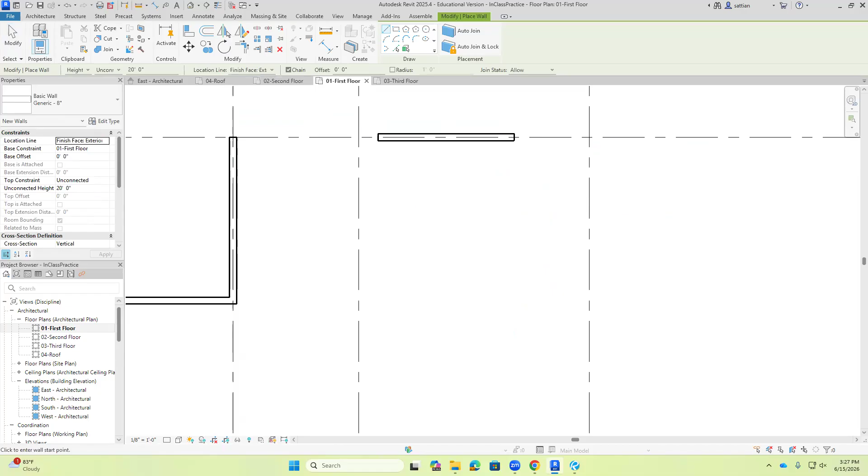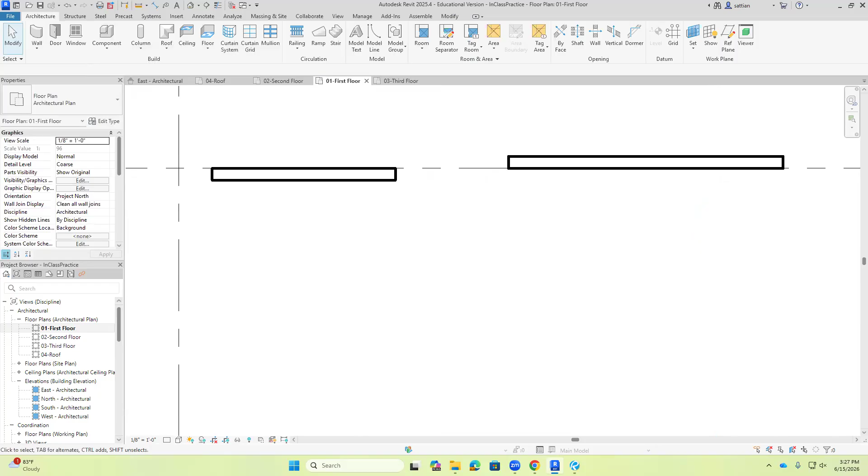Now, on the other hand, if I select wall and say finish face exterior, and draw that wall, the exterior side of that wall is what gets attached to that line. Does that make sense? On the other hand, if I say wall, finish face interior, and draw a wall from here to here, now the interior side of the wall is what gets drawn there. Exterior side, interior side, center line - those are the only things we need to know for now, and draw these walls.

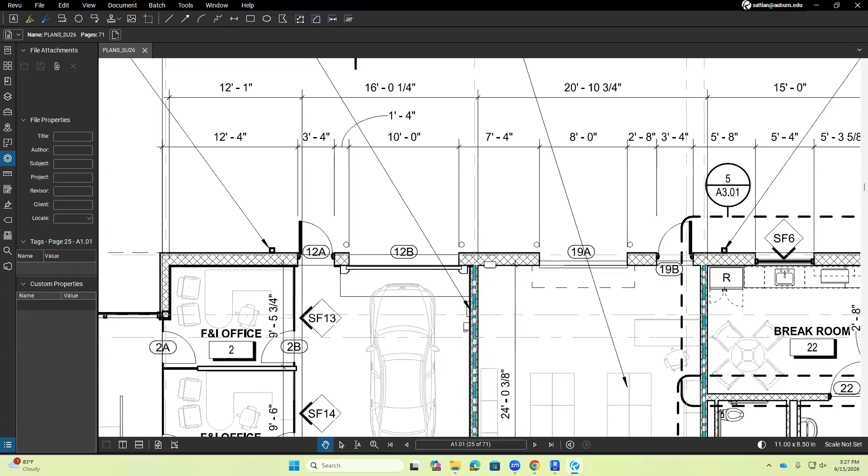And notice the grid line over there. That grid line shows you where the wall is supposed to be. So for instance, I can look at this and know that the center line of the wall and the center line of the grid line are the same, right? So we just want an exterior wall box, and then any interior walls, try to model those, and then we will come back tomorrow to fix all the walls and then carry on from there.

So we can't access this from home if we go in virtual? You can.

What about the career fair tomorrow? Is it tomorrow? Okay, so career fair tomorrow - rules for the career fair for people who miss class. Oh, that's what I thought, it was on Wednesday. Okay, Wednesday, let's talk about it tomorrow.

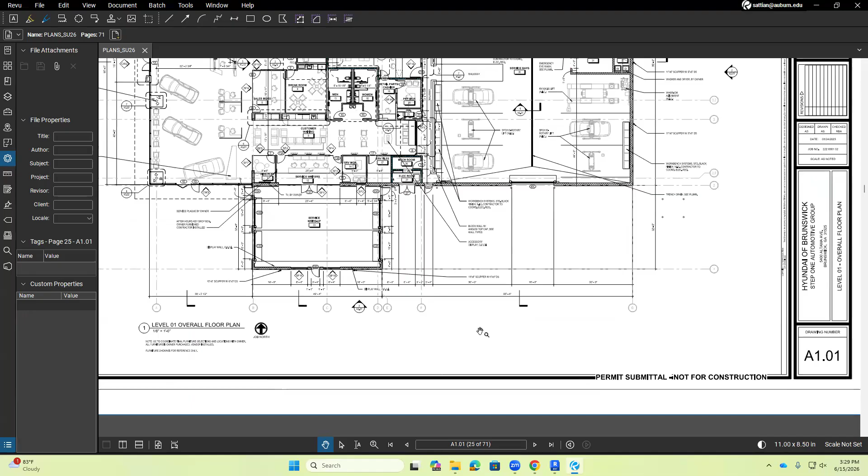What do you want us to save it as? Save it as Revit assignment. Project or template? Projects. Again, save it into your OneDrive, that way you have access to it from home. What is that, cloud model? Cloud model is the same thing as OneDrive. Yeah, OneDrive or Box, wherever.

You can base it off where the trailers are actually, or you can scale this. So I would say, size it. So that's what we did on...